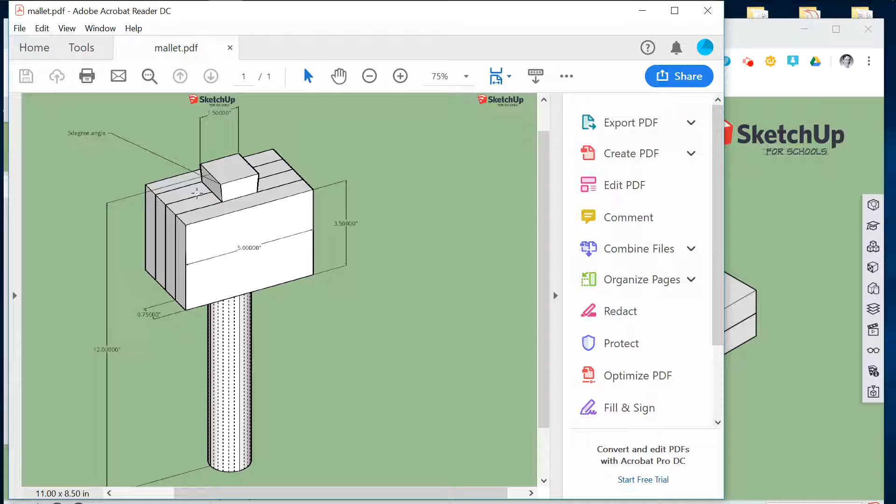Okay, so at this stage now, we have to modify the handle to both get the 5-degree taper and put the round part in it. So first thing we're going to do, if you look at the drawing of the mallet, okay, the handle sticks up. Let's assume it's half an inch. So if it's a half an inch taller than the 3.5, it'll be 4 inches down.

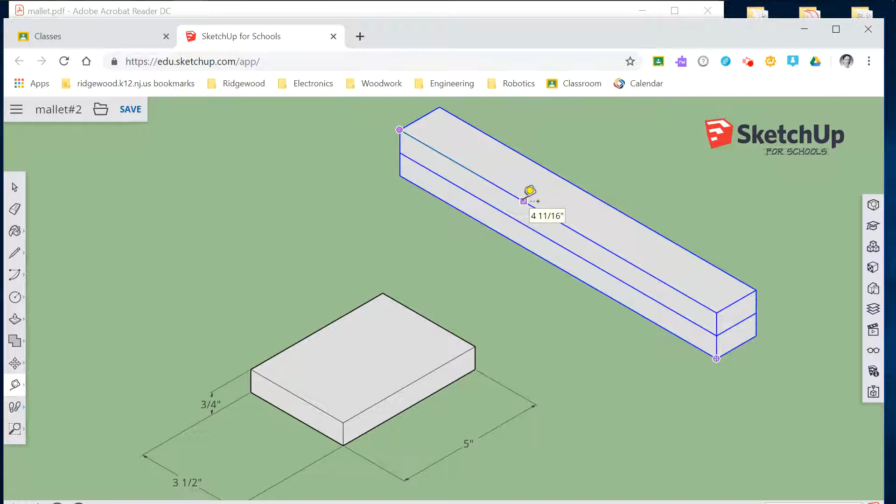So let's make a guideline, and we're going to use our tape measure tool. Come here on the end and either draw out or type in at 4 inches. So now we're at 4 inches, and you'll notice there's a guide point at 4 inches.

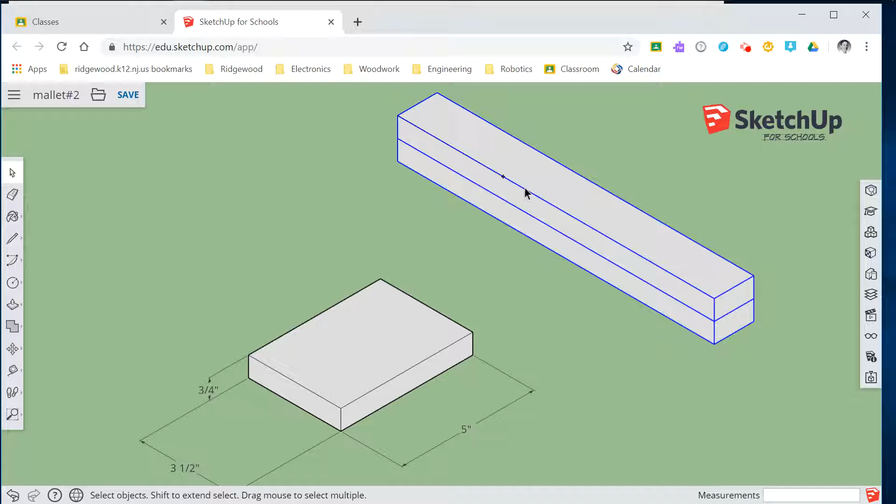All right, so now we need to come into the component, which is take the selection tool, select the component, and double click, and it will now be in the component edit feature. So we are now editing this component. So the first thing I'm going to do is use the push pull tool, and I'm going to shorten the edge of the component.

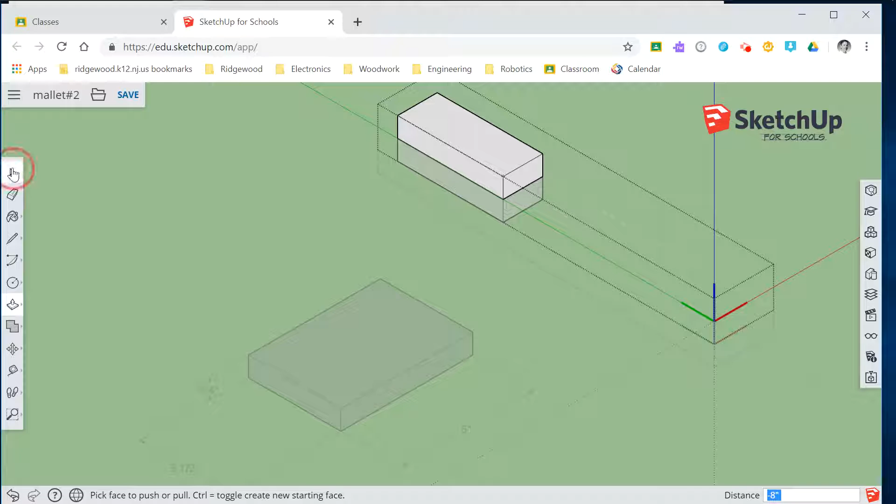So this is a component within a component, so I need to double click on that as well. Now I can take my push pull tool, get this face, and push it all the way in until it snaps to guide point. Now you notice, remember when I said this is a duplicate of this? So whatever I did to this is duplicating the lower piece as well. Okay, so now if I click away, it has now changed that and foreshortened it.

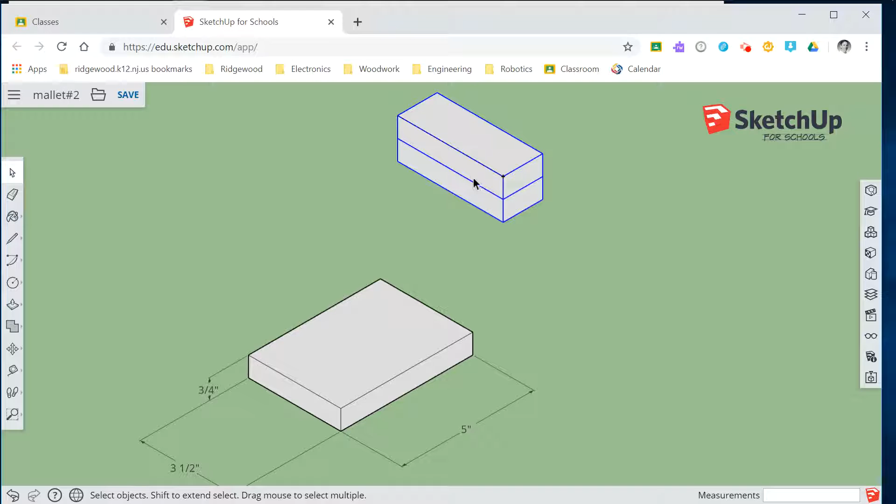Okay, now I'm going to create the handle portion of it. So I'm going to get a circle tool. Actually, sorry, got to go back into this again. Double click. And now I don't want to click on the individual piece. I want it just to be on both pieces. So I'm working within that piece.

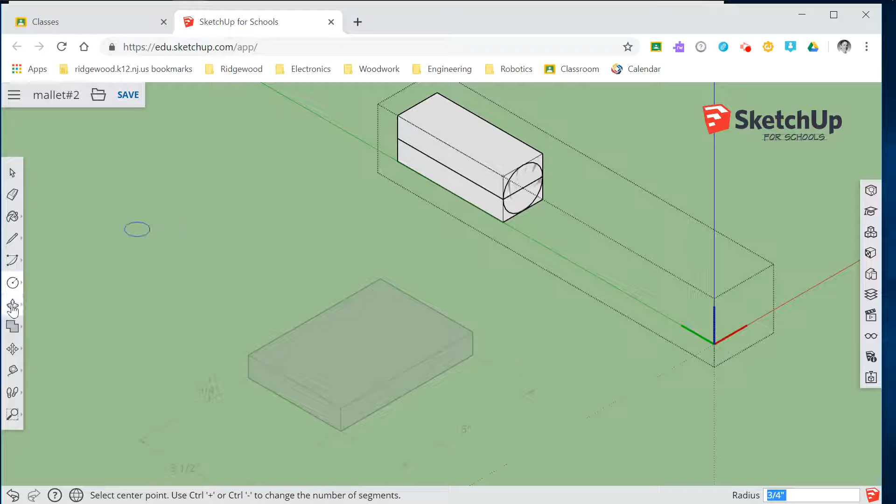I grab my circle tool, which is the middle one here. I find the midpoint, click once, and I drag out to the point, which is the end point. Since it's square, it creates a circle there. Now I want to push pull that back out. So I hover over that circle, click once, and I'm going to drag this all the way back out. So we are going back out to 8 inches.

Press enter, click away. So now I've created that rounded part of the handle. And that's the exact same way you're going to do it on the lathe. You're going to take a square piece and you're going to round it out.

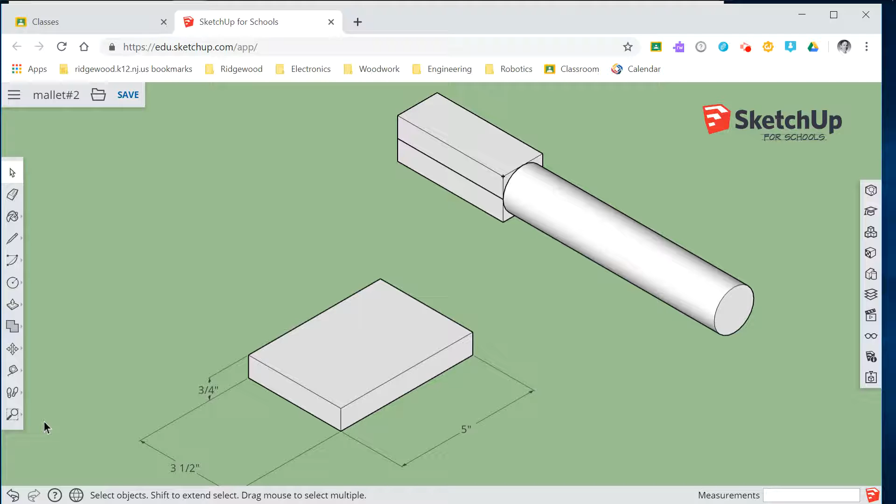Okay, so now I'm going to need to place this piece on top of my other piece. And to do that, I need a different look at it. So I want to look at it from the other side. So I grab my rotate tool here, okay, or orbit tool it's called, and I click and drag, and I want to look at it from this side here.

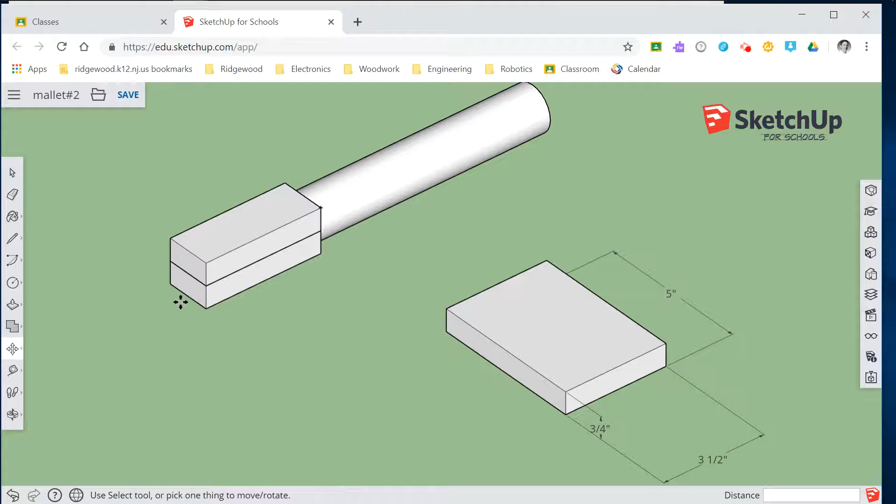Okay, and now I'm going to get the move tool, and I'm going to say midpoint in handle is the point I want. I click once, and I'm going to go to the midpoint in the 3x5 board and click twice. Well, that's not exactly what I want to do. I want to make it ½ inch higher.

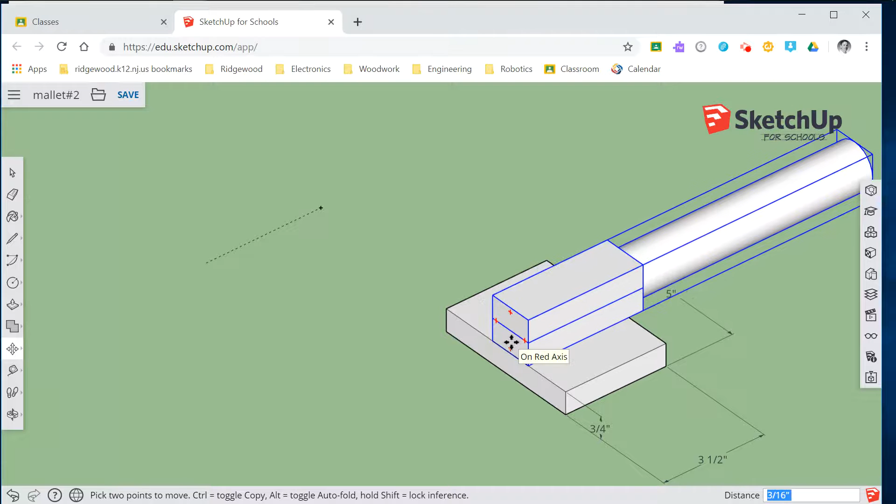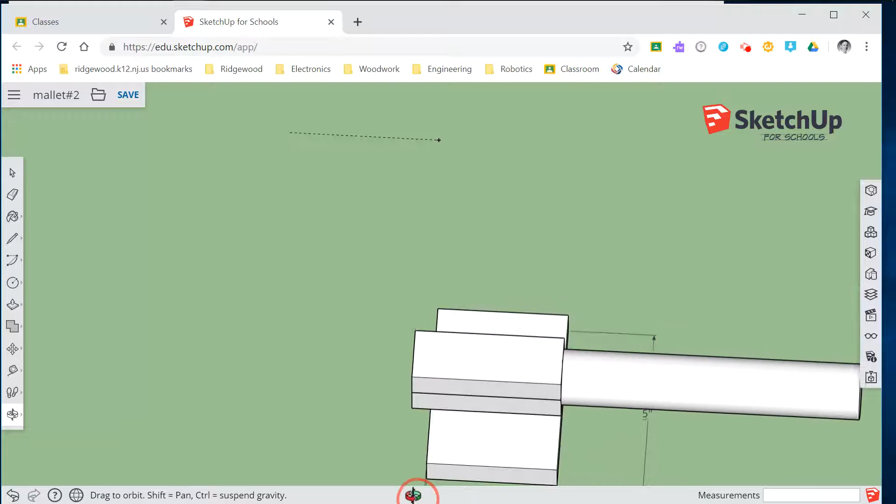So now I go and do my move tool here. Okay, click once, and I'm going to drag out and make sure I'm on the green line, green axis. I'm going to go to ½ an inch or 0.5. So now everything should match up. And if I use my orbit tool, I can come back here and you can inspect and see that everything is in the right orientation.

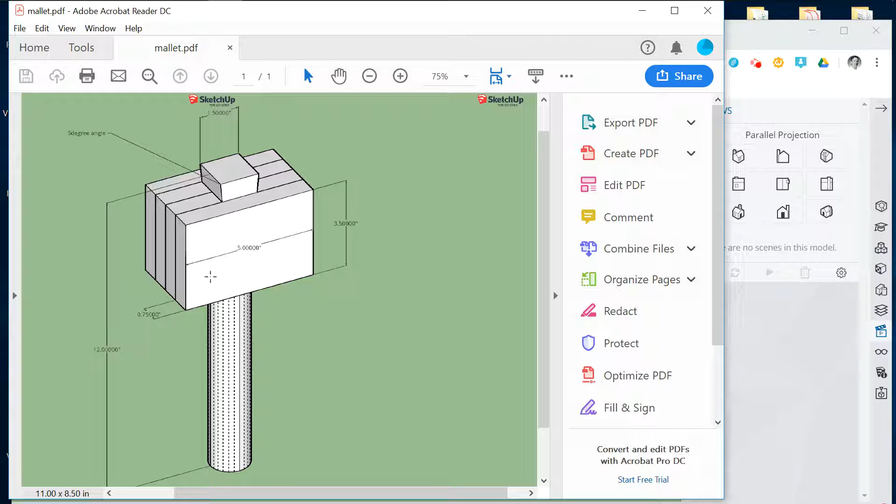Okay, so let's change my view to something that's more workable. Okay, now if you notice in the drawing, and let's skip over to the drawing again, it says that this is at a 5-degree angle. Okay, so it's not squarely sandwiched in between there, it's cut on an angle. So now that's what we need to make. So we have to come in here, double click, and first thing I want to do is make a guideline.

So I am going to, again, go to my tape measure tool, and I'm going to go and find intersection. Okay, and I'm going to drag it straight up and make another line. So now I've made a guideline which is half inch away from the top.

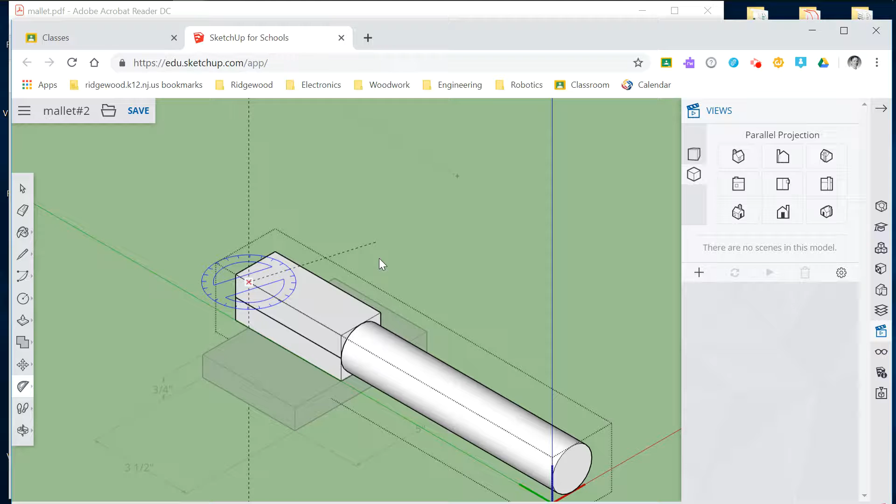Okay, now I'm going to make one other measurement here, and that is to make a guideline with an angle. So I use this protractor tool here, and make sure you are on the blue axis, and I click once, and then I start turning, and you'll notice, here, let's move this up here so you can see the angle. You'll notice the angle, okay?

Okay, we want to marry this to here, which is the end point, so that should be 90 degrees. Now if I turn it out, I want to go negative 5 degrees. Okay, so now you'll see the angle. Again, I can click to any point, and then I type in, okay, 5. Press enter. Okay, it has now made that angle at 5 degrees.

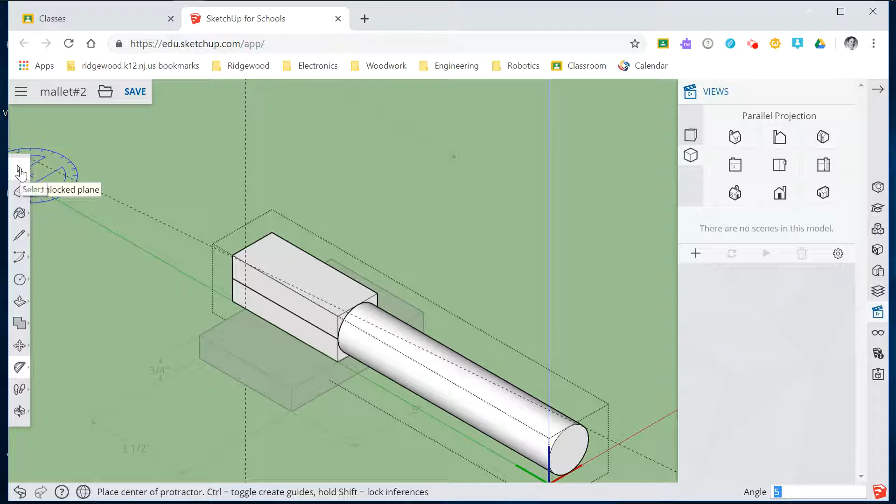All right, so we want to do that to the opposite side. So I'm gonna do the same thing here, and I'm going to come in so I can get a view of it. Select my protractor tool. Okay, click once. Make sure I'm on the straight axis. Okay, which should be lined up with this edge.

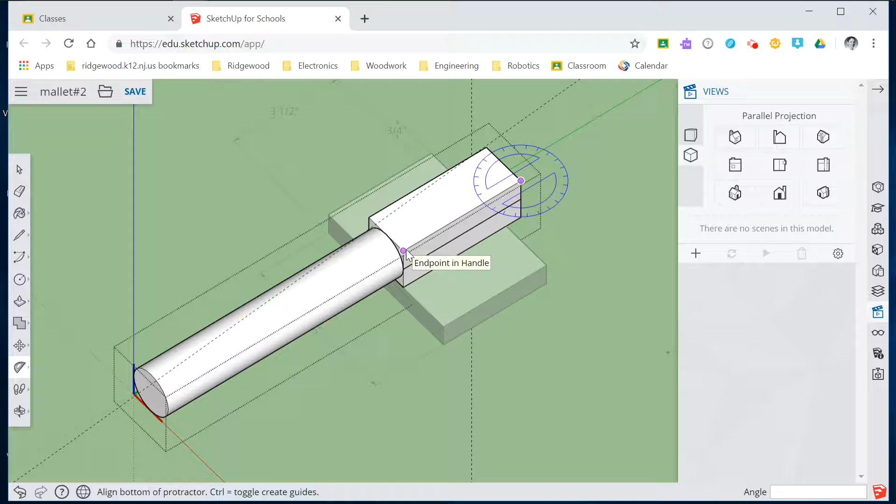Click twice. Now I can move it to the degree I want. Click a third time. So that's set the degree. I want to change the degree. Type in 5. Press enter. And there you go. I have two 5-degree angles.

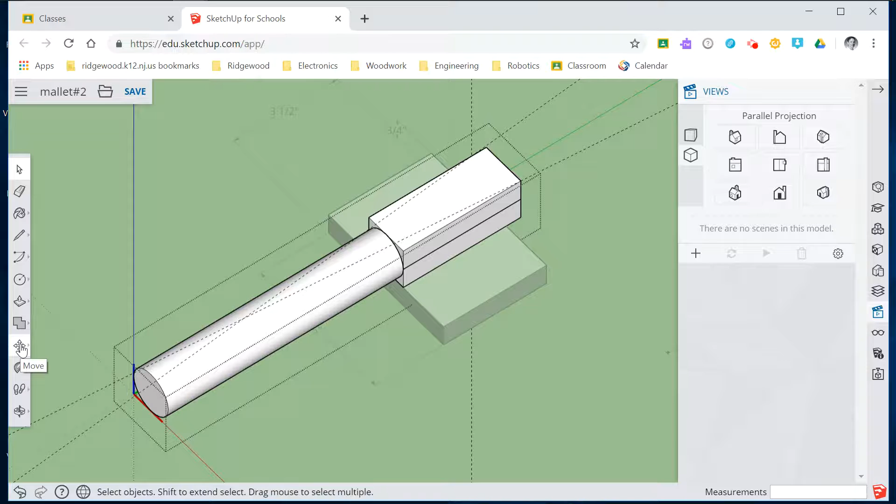So now I want to just move my faces in to those marks. Now we can do it in two different ways. But let's show you the simplest way. So make sure again I'm editing this piece now. So now I want to edit this particular component. So again, this is a duplicate of the component. We're just going to edit the one component. So I double click on it. Okay, so I'm now editing this one component.

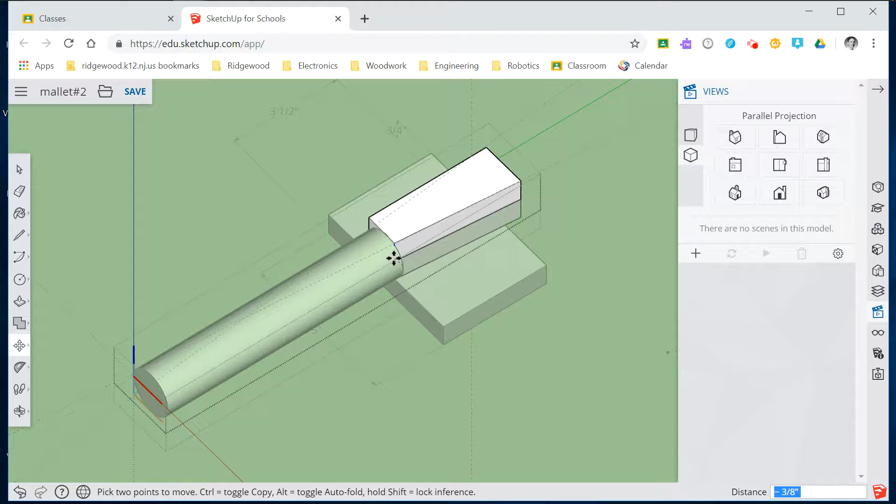Okay, and now I'm going to move an edge. So I'm going to grab this line here, click once. I'm going to move it, okay, until I can find that intersection. Okay, so that's one way to do it.

Okay, Control Z. The other way to do it is to draw a line, okay, on this intersection. So I use my pencil tool. I drew a line, okay, and then it has now created a face here, a separate face, which I can then use my push-pull tool on that face and push it down to nothing. Okay, so my opinion, that's the easier way to do it.

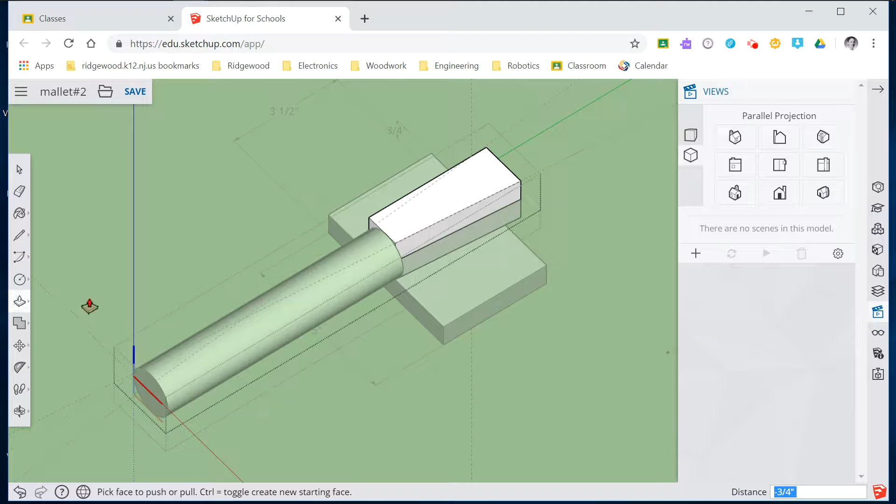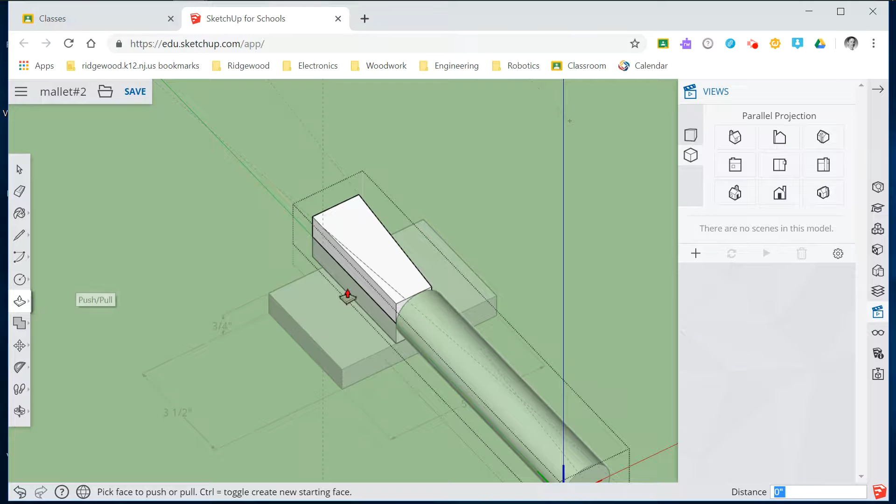Okay, rotate so I view it here again. So again, I get my pencil, I find my intersection of my line here, and my other intersection goes here. Okay, I've selected my push-pull tool so I can get my face, and I pull that down to 0. Okay, and I click away, and we are done. Okay, so now I've created a 5-degree angle, and I have created everything I needed to do.

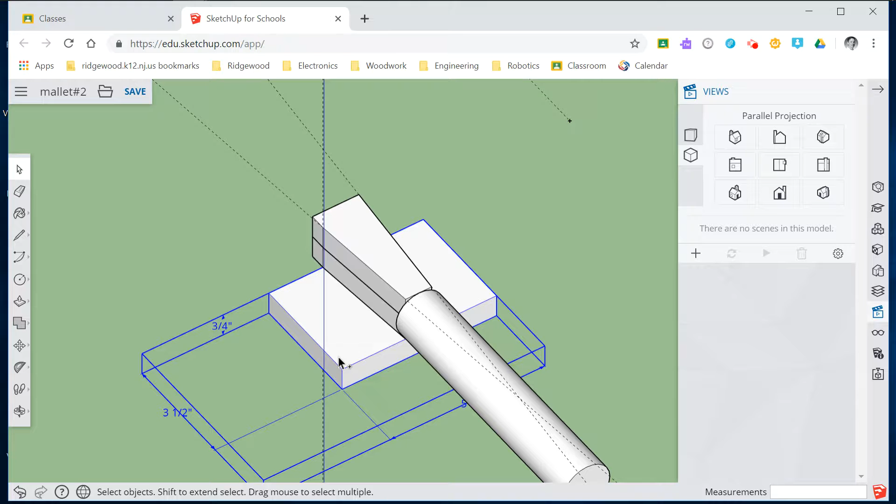Okay, so now I can come back here and I just duplicate this particular component 4 times. Okay, so I've selected it, Control C, Control V. Okay, that's the first time. I grab it by the corner, I marry the corners, Control V. Okay, grab it by the corner, marry the corners, and Control V.

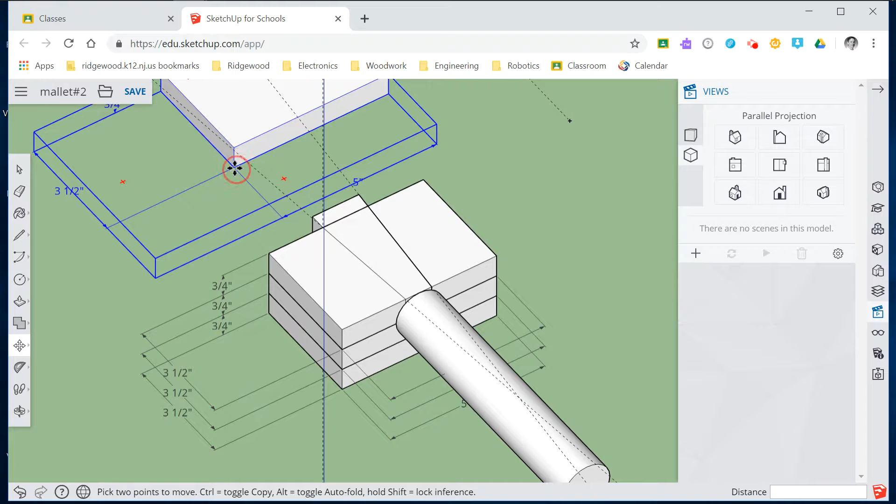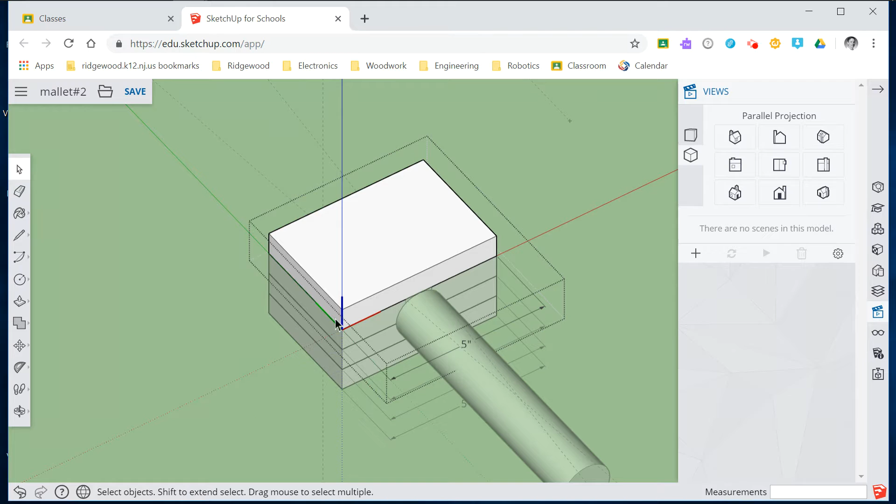Okay, so if you notice it duplicated, in my case, the measurements were part of the component. It's a little bit messy, so I'm just going to go in here and take out these parts from the component. Okay. Okay, so I click on that, delete, click on that, delete, click on that, delete. Okay. So there you go.

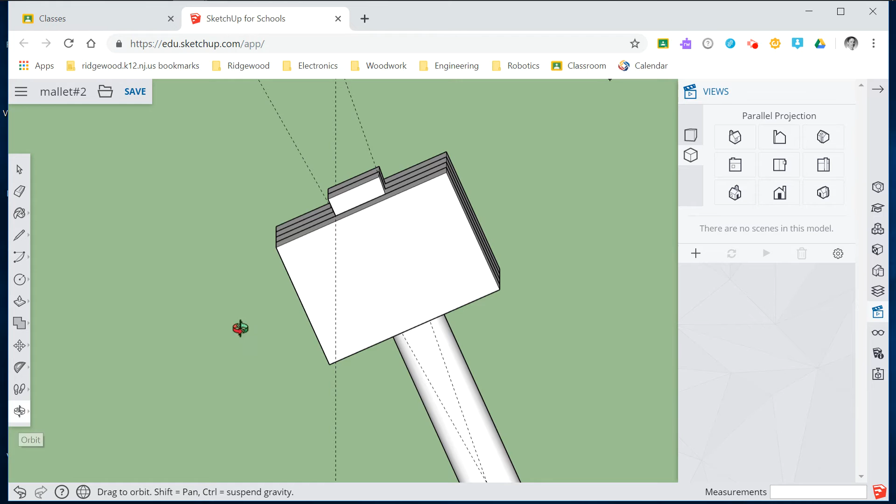There's your completed mallet. Okay, so it's got the round base, and it's got the taper on the inside, and it's got the four pieces. It's the right size. Okay, you can put some more dimensions in here if you want, and that's it.